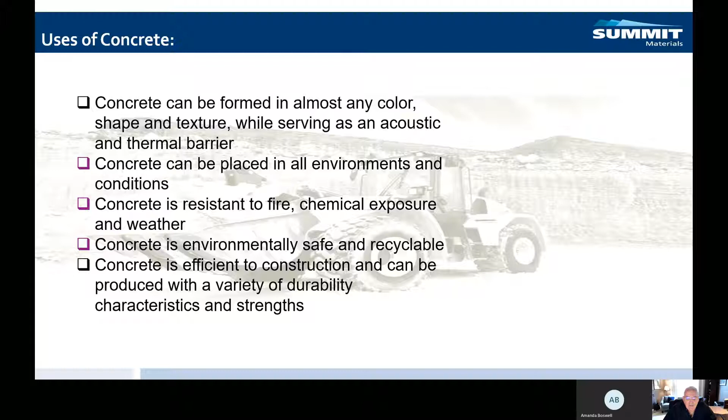All right, so today I'm going to go through the basic process of a ready-mix concrete company. I'm going to talk a little bit about concrete so that you understand it a little bit as a building material and its place in the world. An engineer would describe concrete as a flexible building material. Basically able to be placed in many different environments, resistant to chemical exposure, to weather, environmentally safe and recyclable, which is something people don't often think about with concrete, and an efficient way to build many types of structures.

So you'll see here just a couple of different things that could be built with concrete. It's far and away not limited to these things. And we're going to talk a little bit about the official uses of concrete. But you saw there a bunch of different kinds of structures, things you could see in almost any construction site.

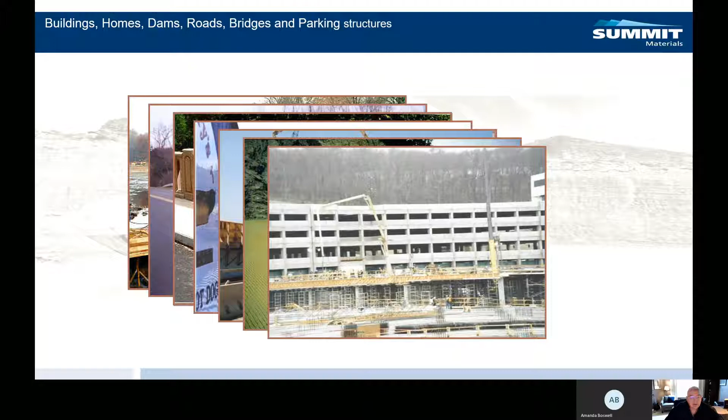A couple of fun facts about concrete. Annual global production of concrete is about 5 billion cubic yards. Twice as much concrete is used in construction around the world compared to any other building material: wood, steel, plastic, aluminum. After around 4 weeks, concrete has reached 90% of its final strength. However, it continues to gain strength for decades afterwards. And due to the conversion of calcium hydroxide into calcium carbonate, it also absorbs carbon dioxide, which is something that I think is also not usually talked about related to concrete.

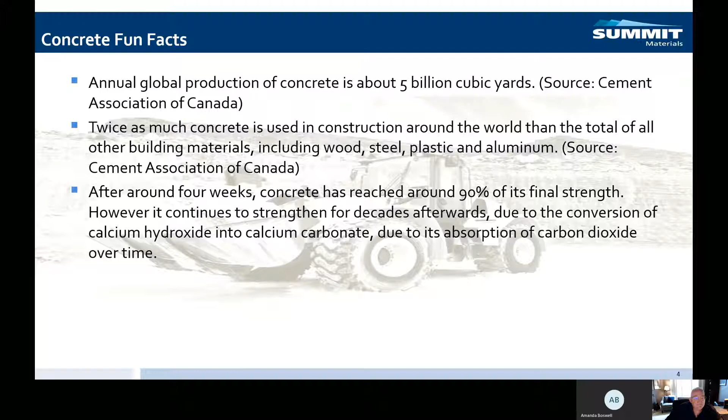So the figures here on the left-hand side show the use of Portland cement. Portland cement is the main ingredient in concrete, and you'll see that about 70% of the Portland cement produced around the world actually goes into ready-mix concrete. And then you'll see a whole bunch of other concrete-related industries off to the left, and those are all much smaller, obviously, but still relevant to our industry because sometimes we work in those groups as well.

On the right-hand side, it shows the breakdown of the kinds of projects, and the biggest pieces there are residential buildings, streets and highways, and then commercial buildings. The rest are small pieces that you would think of in construction. One I'll point out because it's a big cement user is oil well cement, and our business in West Texas actually supports some of the oil well applications. So it's one of the things that you could run into looking at some of our businesses across the country.

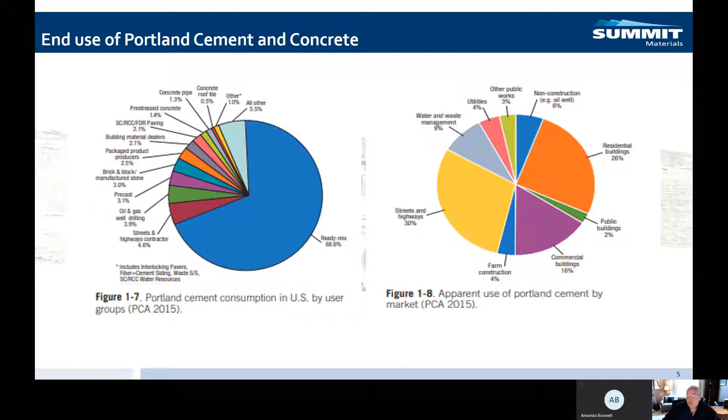So what is concrete? Concrete is 6% air. It's 11% Portland cement. It's 41% gravel and crushed stone and 26% sand, which is the fine aggregate, and then 16% water.

One of the things I think is really important for you to understand about the concrete business in relation to Summit Materials is that the gravel and sand are also products that we make a significant amount of. Our aggregates is by far our largest business. And so we are a large downstream user of a lot of our own products. And it's one of the reasons we're in the concrete business.

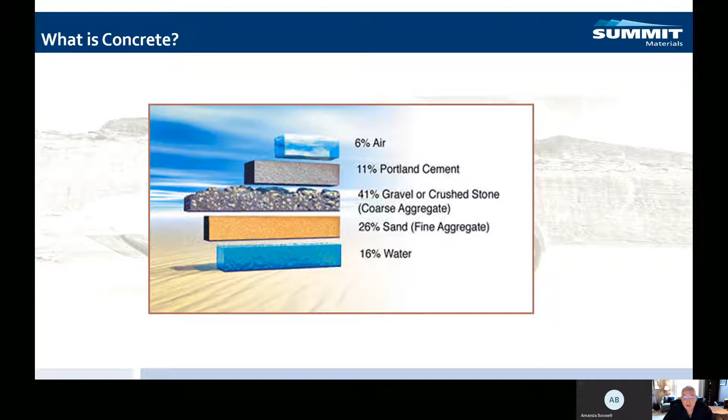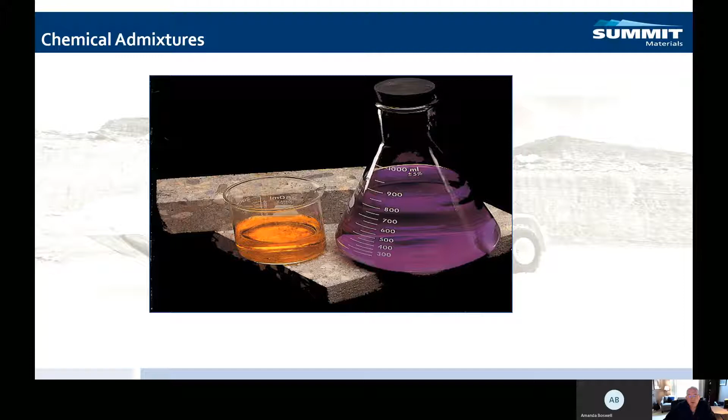Also in those mixtures can be chemical admixtures, and there's things there to reduce the amount of water, to accelerate set or retard set, a lot of different applications that can be further changed through chemistry.

So they are additional products that we use. They're really recycled byproducts. So it's one of the things we do to increase the amount of recycled materials in our mixes.

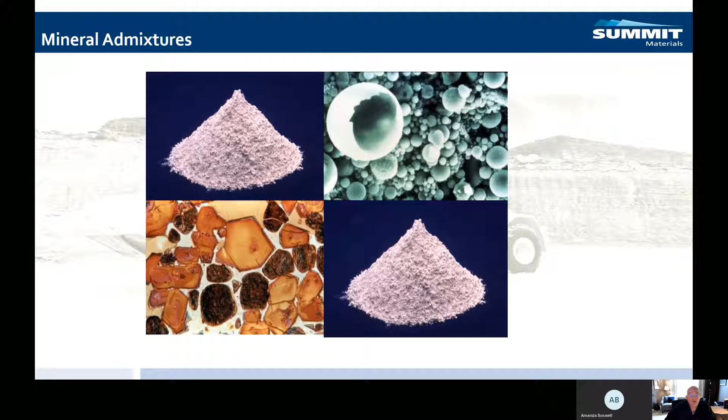Let's talk a little bit about the history of concrete. And this is one of my favorite pieces. Rome was built significantly out of concrete. A lot of the major structures you've seen from Roman architecture, like the Colosseum, were constructed out of a very primitive concrete. It was a cooked limestone and water and aggregate mixture, but clearly it didn't require modern design in order to last for a long time.

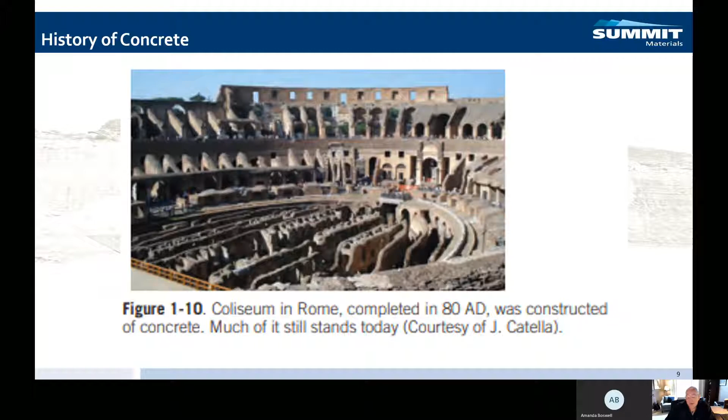The structure is significantly intact and has been there for a very long time. And there's an awful lot of structures throughout the old Roman Empire that are there and still standing.

This is kind of the history of concrete in modern times. I won't read through all these, but one of the things I'll point out is in 1860, Portland cement, which you'll hear a lot when you're at a ready-mix facility. It's basically a design for cement that was named after Portland, England, which is where a particularly good deposit of limestone was first discovered to produce cement. And that has stayed with it for a long time since then.

I think one of the things that is most impressive is the creative ways that people have found to use concrete over history, and the thought of first deciding to build that in a structure I always think is fascinating, because it is a totally different kind of construction than what would have been done over the course of most of history.

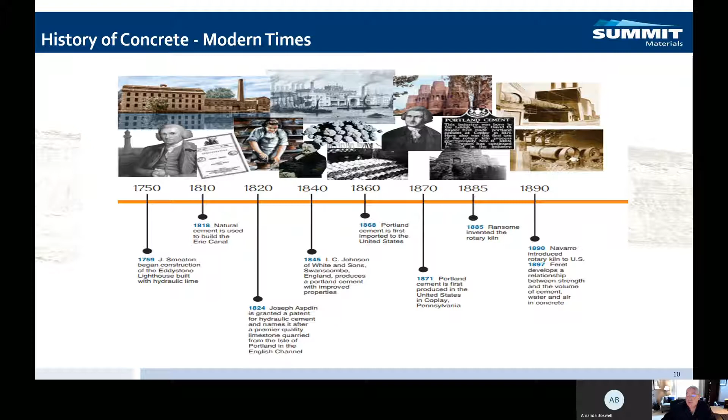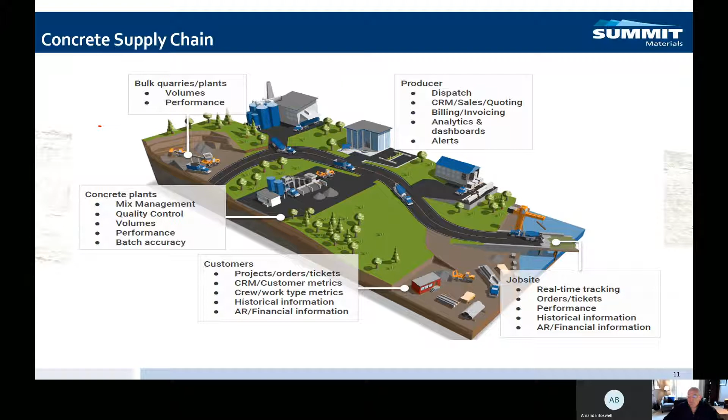So it's just kind of the cycle of where we go from raw materials to delivering to the job site. We're going to talk a little bit more about each one of these, but that is the big picture.

So what I want to show you next, now this is going to be a little bit long, but this is a new NRMCA, and NRMCA stands for National Ready Mix Concrete Association. So it's the major association related to ready mix concrete. And it is produced with the focus on the most important thing that as a new employee, you will do when you go to a ready mix plant, and that's stay safe.

It's a ready mix facility. If you've never been to one before, or you've only spent a little bit of time in one before, they're busy. They're well organized, but they have a tight traffic pattern. There's a lot going on. There's a lot of materials moving. And so they can be dangerous. They're designed not to be dangerous.

And if you follow the rules that you're supposed to, I want to say that you'll be as safe there as you are anywhere. But the first thing, and we'll talk a little bit after the video is over, the first thing I want you to see is what National Ready Mix says you do to be safe at a concrete facility.

Welcome to a lesson in the National Ready Mix Concrete Association's online safety series, Ready Mixed Concrete Plant Safety. The plant safety video lesson was generously funded by the RMC Research and Education Foundation.

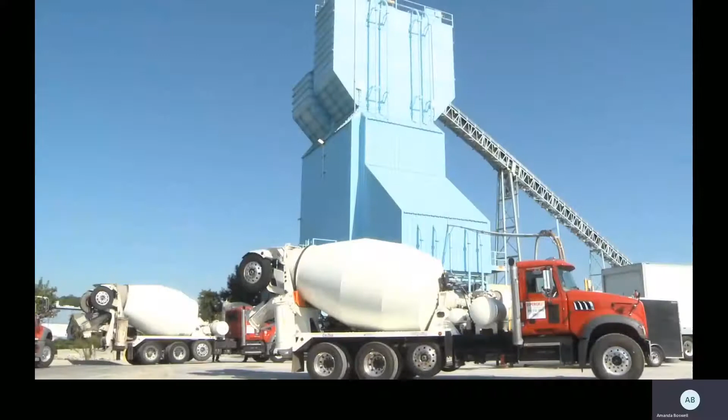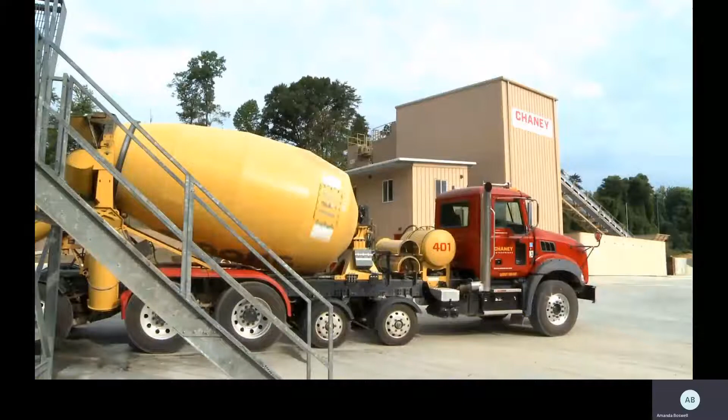There is a lot of activity at a ready-mix concrete plant. Aggregates and cement are transported by various methods to scales and batchers. They are mixed, and then they're put into mixer trucks. Ready-mix concrete trucks are rinsed, the concrete slump is checked, and the trucks are ready for the road. Dump trucks bring raw materials to the plant, and tankers deliver cement to silos. Front-end loaders move materials around the plant. And in short, a ready-mix concrete plant is like a small city.

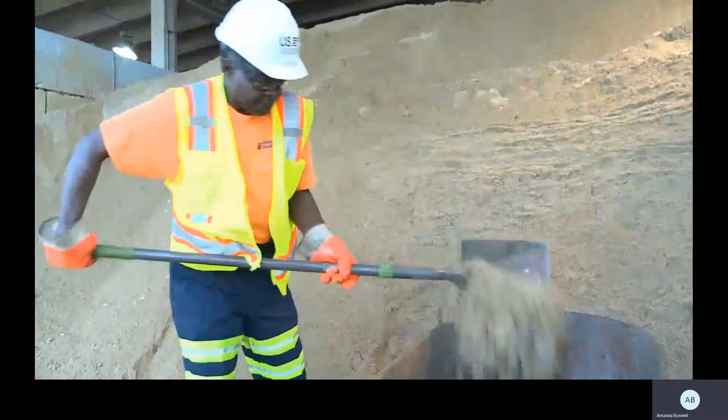Whether you're a plant operator, yard man, mechanic, concrete delivery professional, or you're just a visitor, you have to pay attention to what you are doing and follow basic safety procedures at all times. In this video, we will cover plant-specific safety, including plant vehicle traffic, wearing the proper personal protective equipment, general plant safety signage, prevention of slips, trips, and falls, general plant safety inspections, lockout and tag out of power sources, and plant housekeeping, and much, much more.

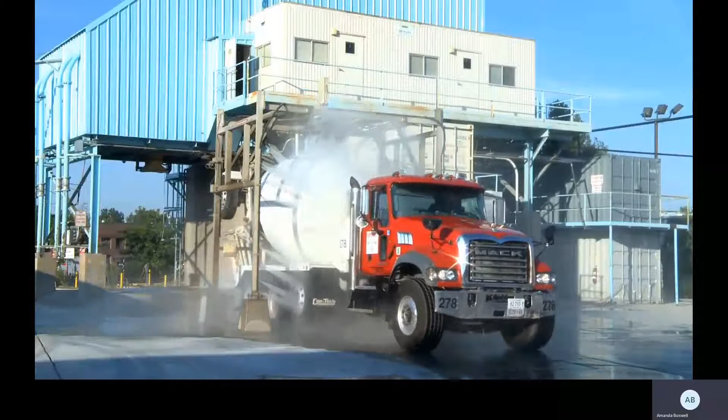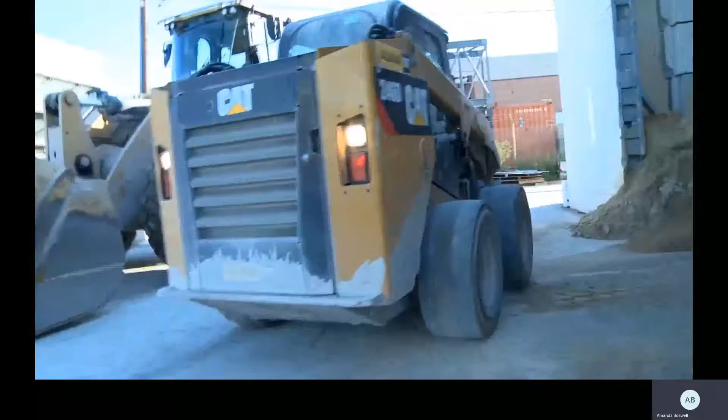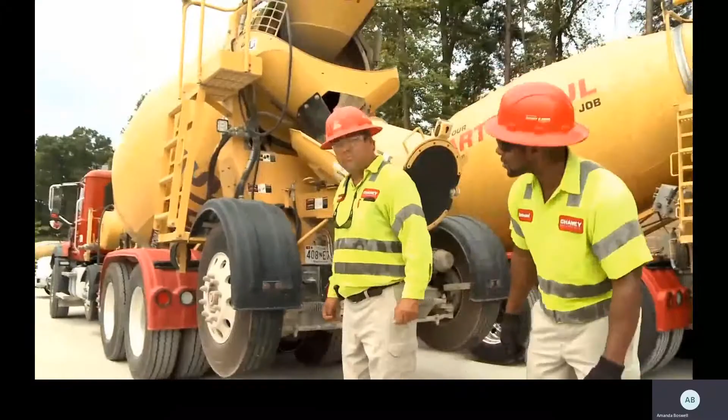As mentioned earlier, concrete plants are busy environments. Specifically, the number of vehicles operating at a concrete plant are numerous and continuous. Throughout a typical workday, there are any number of vehicles moving about, including concrete mixer trucks, cement tankers, aggregate haulers, company and personal vehicles, forklifts, front-end loaders, and other industrial vehicles. All personnel at a concrete plant should constantly have their eye out for moving vehicles, whether entering the concrete plant property, exiting a structure at the plant, or simply working in the plant's yard.

Also, personnel should be aware of the special dangers of trucks that are backing. As well, look out for and obey any and all signage for designated walkways inside and outside of the plant. And finally, remember, make sure you give all vehicles the right of way.

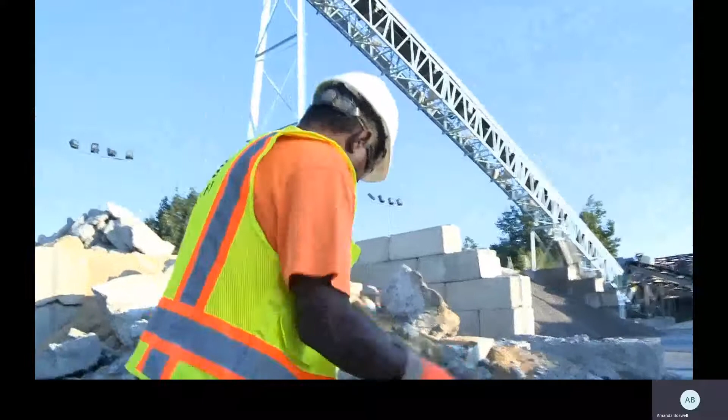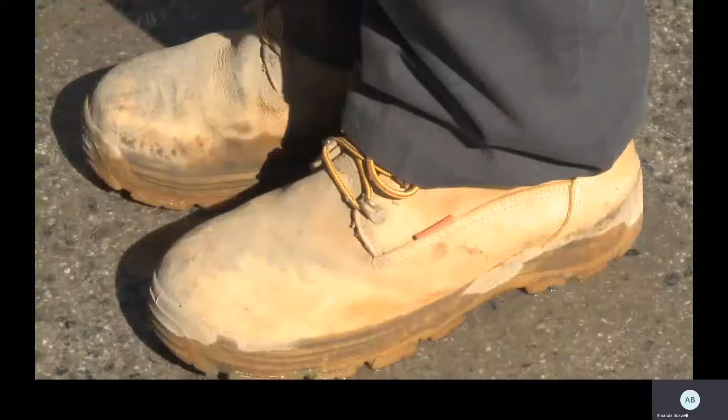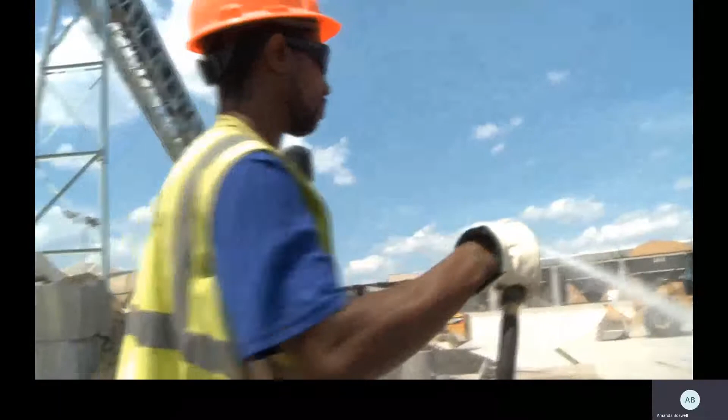Depending on your job and work assignment at a concrete plant, the PPE that you should wear will vary. As a certified delivery professional, a hard hat, safety vests, safety glasses, chemical-resistant gloves, and the appropriate safety shoes need to be worn. While performing the duties of a yardman or laborer, a hard hat, safety vest, safety glasses, and appropriate safety shoes will be required. Additionally, you may need hearing protection, a respirator, and work gloves.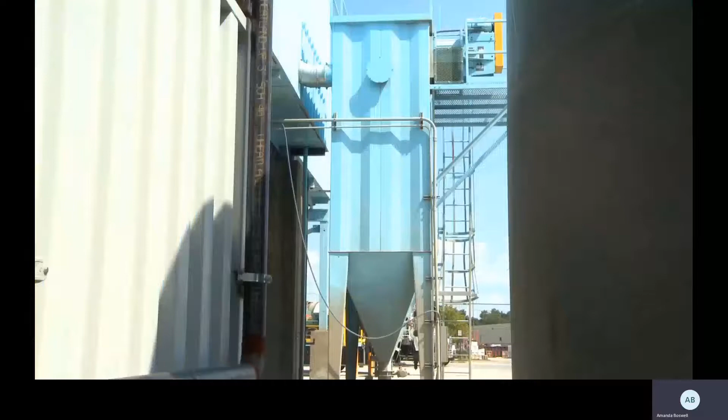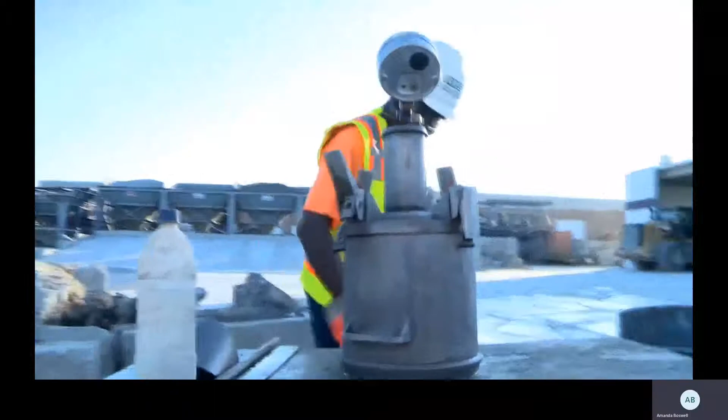If your job requires you to enter a bin or a silo, dust collector, central mixer, or any confined space, then you also may have to wear a full body harness and may be accompanied by a supervisor and/or an attendant. No matter what your job is and the task at hand, you'll need the proper PPE. If you have any questions about what personal protective equipment to wear, ask your supervisor or the plant manager for guidance before performing the work task.

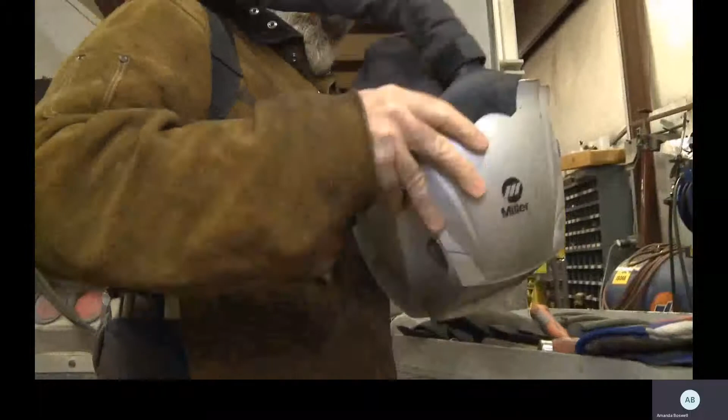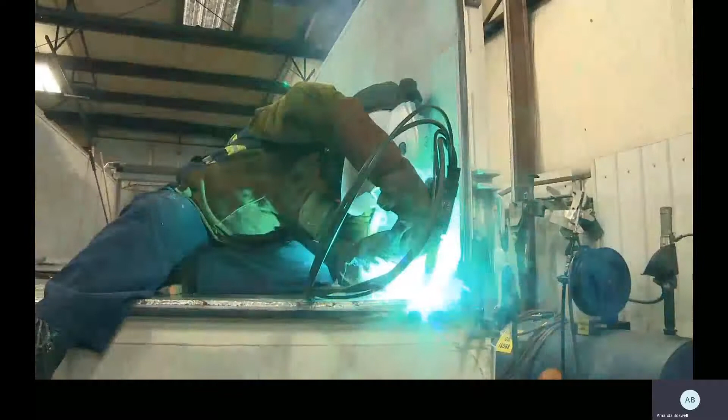Finally, when around welding activities, these tasks should be only performed by authorized personnel using the proper PPE. As well, any other personnel in the vicinity of welding activities should never look directly at the welding process without proper eye protection.

For a plant manager or a plant operator, signage is one of the first items for review. Are there posted traffic control signs in and out of the plant? At fuel stations, there should be no smoking and flammable liquid signs. Any hazardous material needs to have proper labels and to be stored only in designated areas. Or PPE signs in the proper areas where required PPE is to be worn.

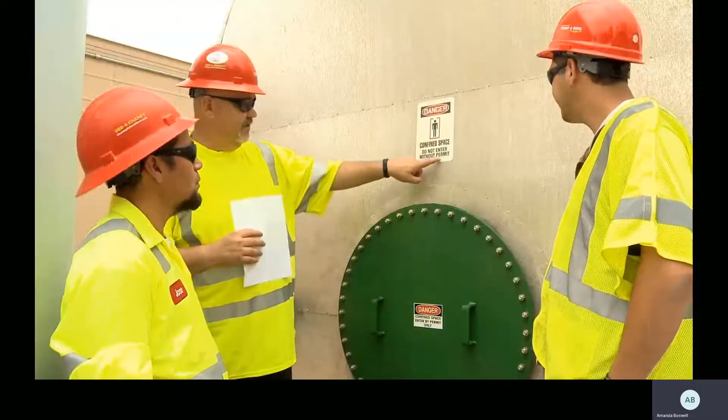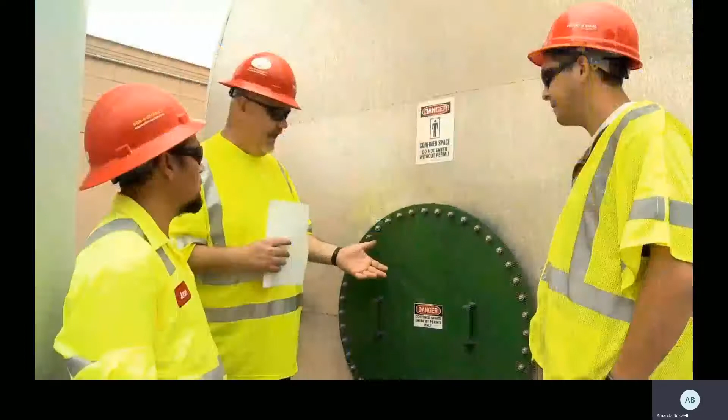Confined space entry signs need to be posted and visible to all employees in areas that are considered confined spaces. These may include central mixers, hoppers, bins, dust collectors, material storage areas such as silos, and even where some conveyors operate. These areas may only be entered after a supervisor has trained employees on the confined space entry procedures, a permit is signed by workers and supervisors, atmospheric conditions are tested, and the proper PPE is worn.

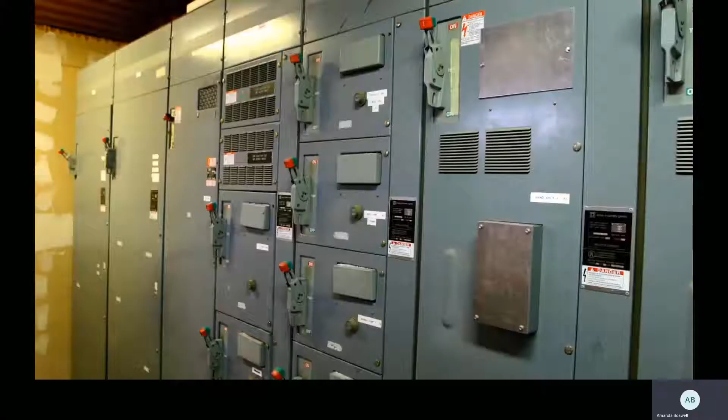Signs must be posted identifying areas that require lockout and tagout procedures before workers perform inspections, maintenance, or repair. Primary and secondary power source terminals and switches need to be completely labeled to all equipment. All breaker panels need to have individual switches labeled to identify equipment energized by these switches. There should be no gaps or missing switches.

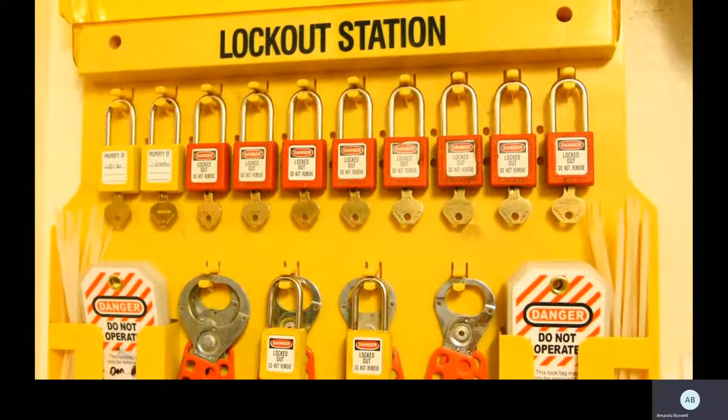Lockout boards and signs may be posted at the plant. They should have multiple lockout devices and individual locks and keys on them, and be placed in a central location accessible to authorized employees during their work shift. If there are regulated areas at the plant, signs for those areas must be adhered to.

As well, fire extinguishers should have individual signs displaying the location of each fire extinguisher. Never allow clutter or obstructions to block the pathway to the signage or the fire extinguisher at any time. All exits must be clearly marked with lighted signs.

Historically, slips, trips, and falls are the leading cause of injuries at concrete plants. Always walk at the plant. Don't run. Workers and visitors should always wear the proper work shoes at all times. A good sturdy pair of lace-up boots, approved by your company, is a good place to start. The moment you arrive for work, make sure that those shoelaces are tied. By the way, those soles need to have a good tread on them for good traction.

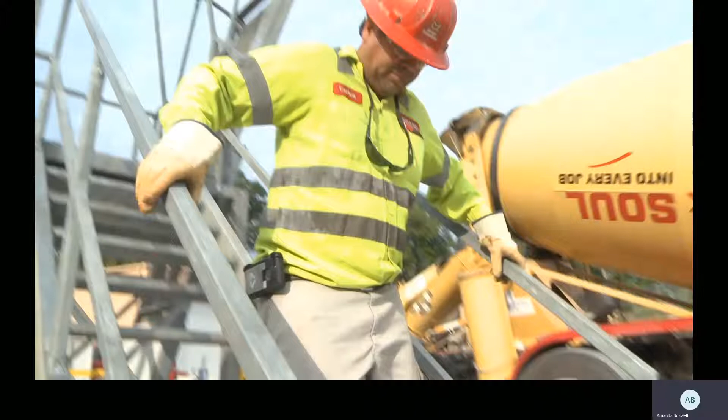Use handrails going up and down stairs. Don't carry tools in both hands, preventing you from using the handrails. Don't put both hands in your pockets when walking on stairs. Don't carry an object tying up your hands and blocking your view. Leave a hand free for the handrail and watch where your feet are going. Avoid things like stepping on tools. Avoid a collision at a blind corner.

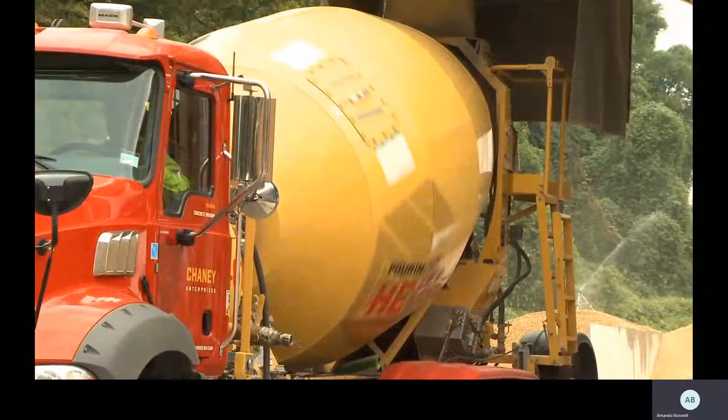Step carefully in wet areas. Often in the load lane or rinsing and slump rack areas, the surface may be wet, which can be slippery. Concentrate on every step and walk carefully when in these places. When working around the discharge points of the plant, use caution not to walk directly under the discharge area. Materials may become dislodged and fall on you, even if the equipment is not currently in the discharge mode.

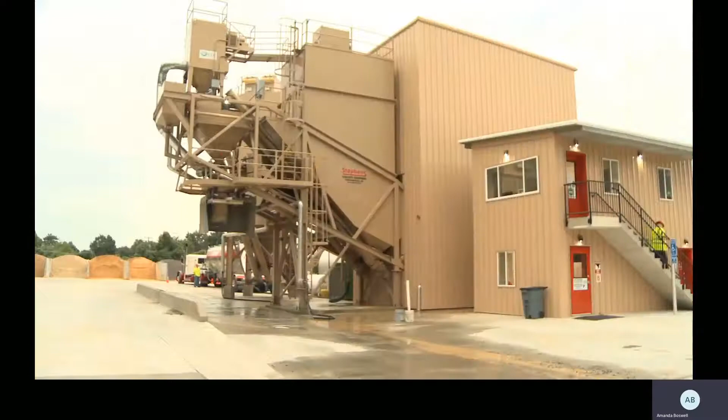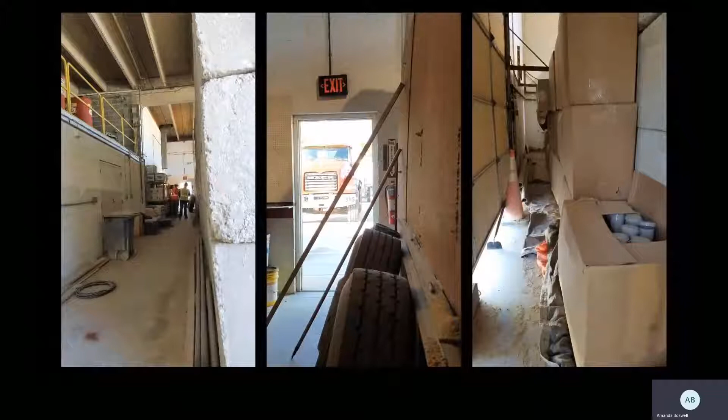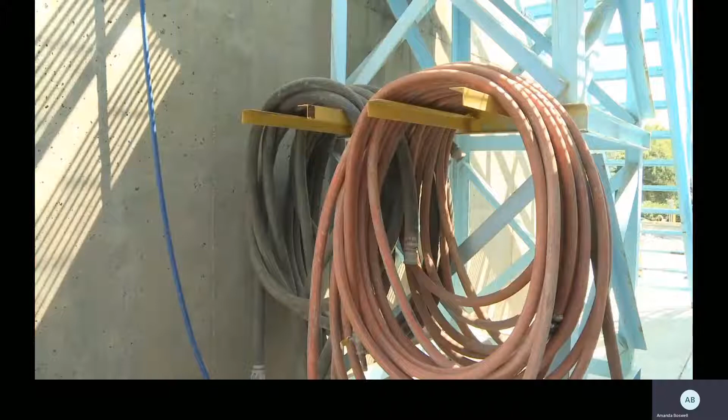Regularly scheduled plant safety inspections will be conducted. During a walking visual inspection around the plant, are steps in a proper state of repair? Are all handrails in place and usable up and down stairways? Are there bags, boxes, or items cluttering walkways, or are they stored neatly? Are there places for washdown hoses to be coiled and hung so that employees may walk through those areas without tripping? Plant walkway inspections for cleanliness need to be performed.

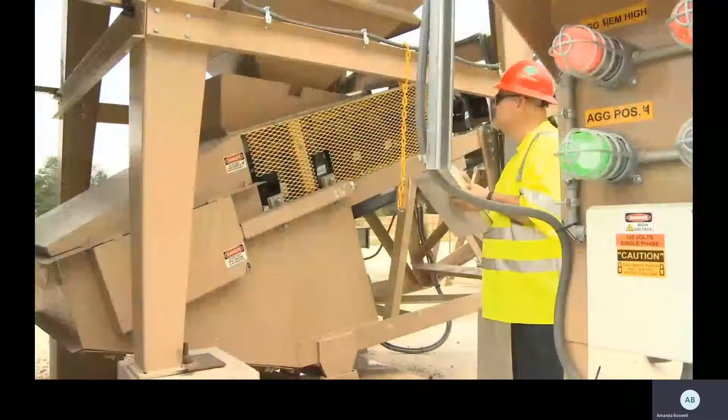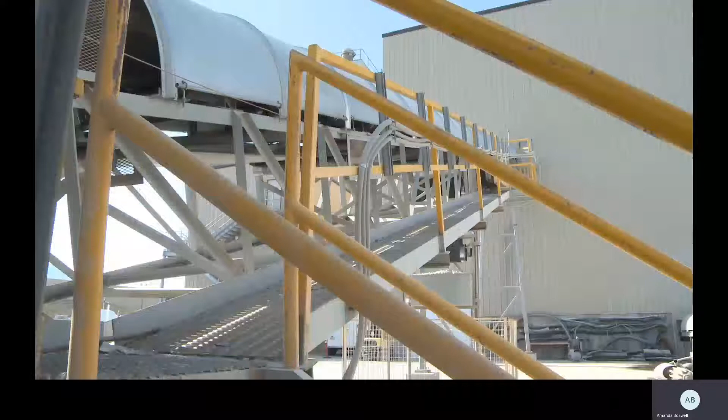And is there excess buildup on the walkways? Does buildup come into contact with water, forming slippery conditions? If so, have the areas cleaned so that slips and trips don't occur. On conveyor belt systems, are all head and tail pulley guards in place? Are all handrails in a good state of repair and available for use? Do emergency stop cords work correctly when pulled? Are the conveyor walkways free of excess material buildup?

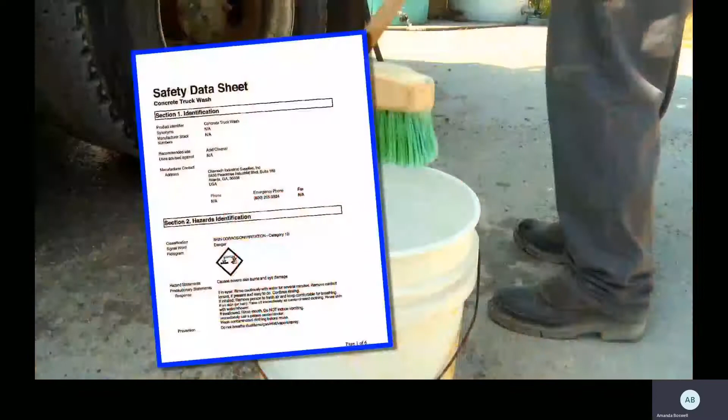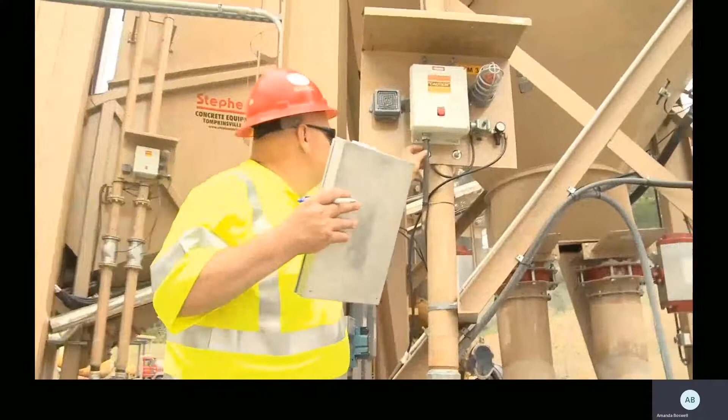Safety data sheets need to be kept and accessible to all employees. These product information and first aid remedy sheets will have specific information for various hazardous materials and products found at the plant. When making plant inspections, be observant, be thorough, and if there is a safety hazard or defect you've identified, have it corrected at once.

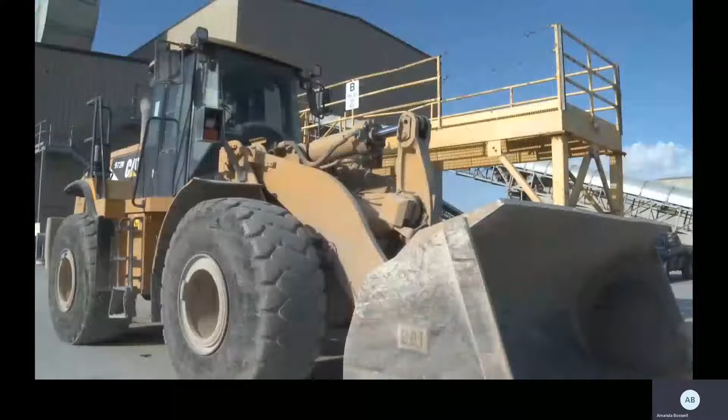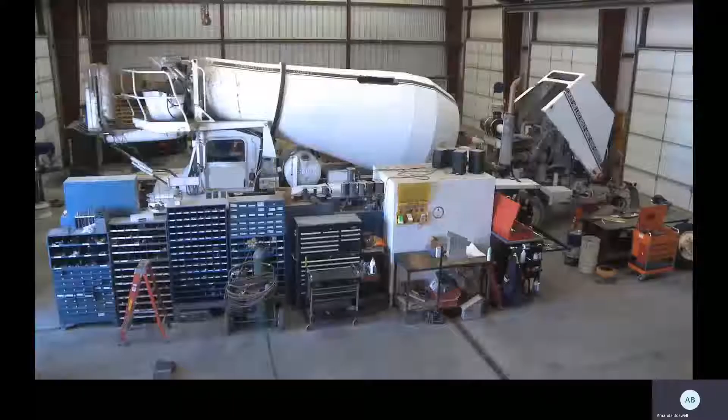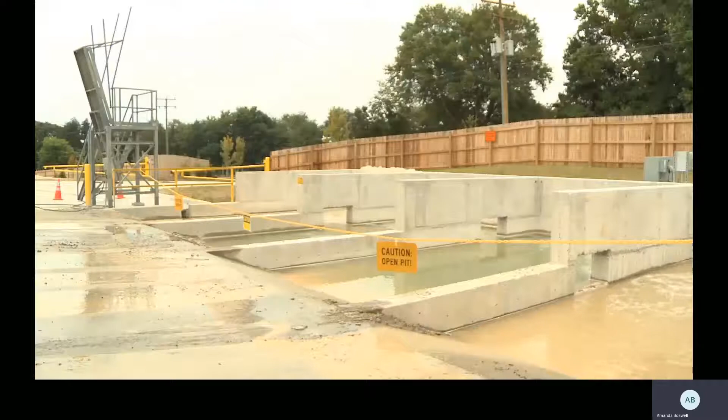Other areas of particular concern for regular inspections include, but they aren't limited to, aggregate storage areas, confined spaces, dust collection systems, compressed air systems, maintenance shops, warehouses, admixture and color storage areas, cement and fly ash filling areas, truck washout areas, and outside lighting.

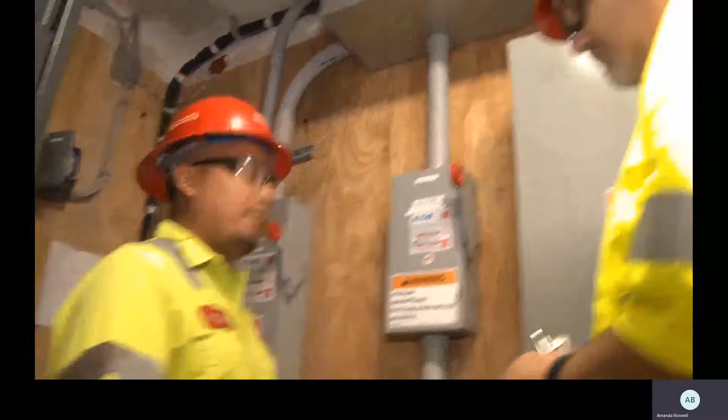Whether you're working on a conveyor, a central mix drum, a scale gate, or checking rubber boots, when you inspect or repair a piece of energized equipment at the plant, you first need to lock out and tag out the power sources to the equipment and test it before inspection or repair.

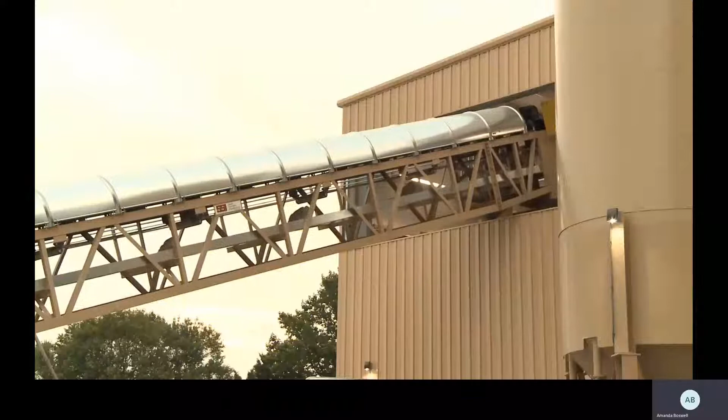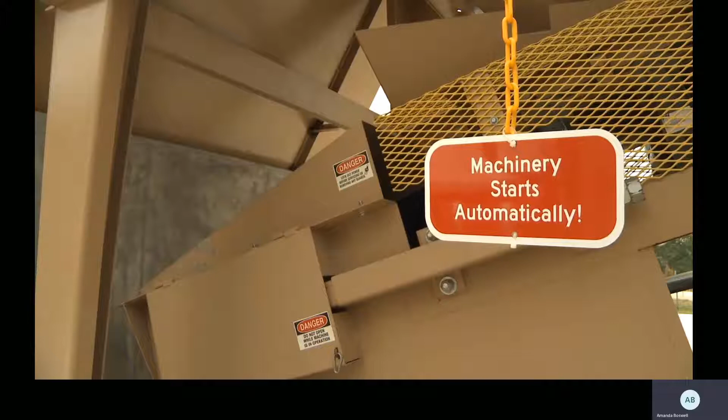Never attempt to clean, oil, adjust, or repair any machine while it's in motion. It doesn't matter that you'll only be in that area for only a few seconds or minutes. That is all it takes for equipment to start without warning and to seriously injure or kill you or another worker in the absence of observing lockout tagout procedures.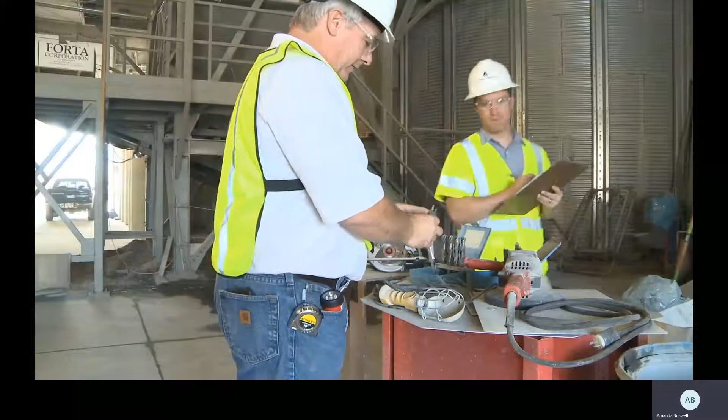For more detailed information on lockout tagout, please refer to NRMCA's online safety series, Lockout, Tagout, Tryout in the Ready-Mix Concrete Industry. Always remember, operations of electric-powered equipment can be as safe or as hazardous as you make it. Proper inspection, maintenance, and repairs will keep all personnel safe.

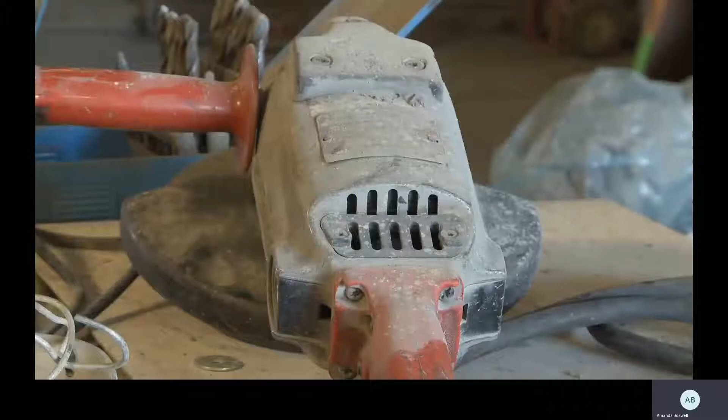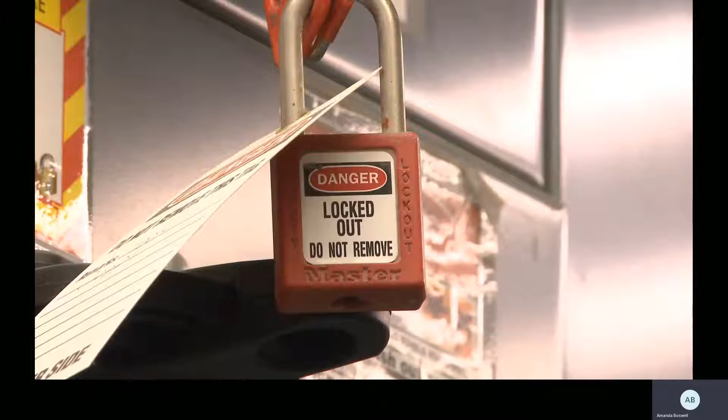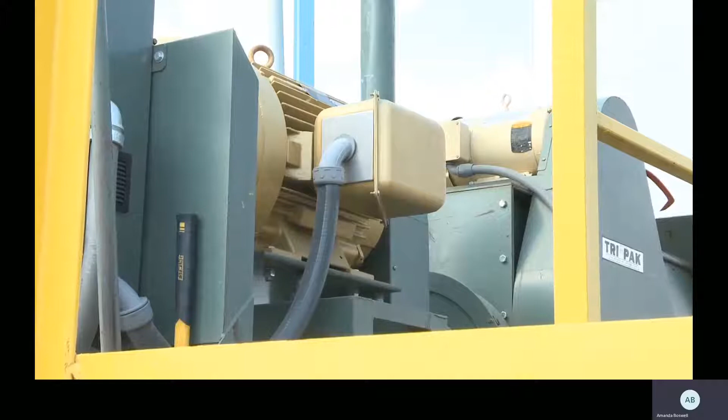First and foremost, a qualified electrician should perform all repairs to any electrical systems. Any electrical repair should be accomplished in strict accordance with lockout and tagout procedures. Make sure that all electrical equipment is properly grounded. During routine plant inspections, make sure that all electrical cables and electrical enclosures are in good condition and kept out of any water.

As you can see, there are many people and lots of activity underway at a ready-mix concrete plant. Use safe work practices in every task that you perform at the plant. If you have any questions about safety procedures or tasks, ask your supervisor or the plant manager for instructions before performing these tasks. What we want to leave you with is this, that safety in the workplace is about making sure that each and every worker gets home at the end of the day the same way that they started, healthy and alive. Adhering to sound plant safety practices is just one more way to ensure this happens.

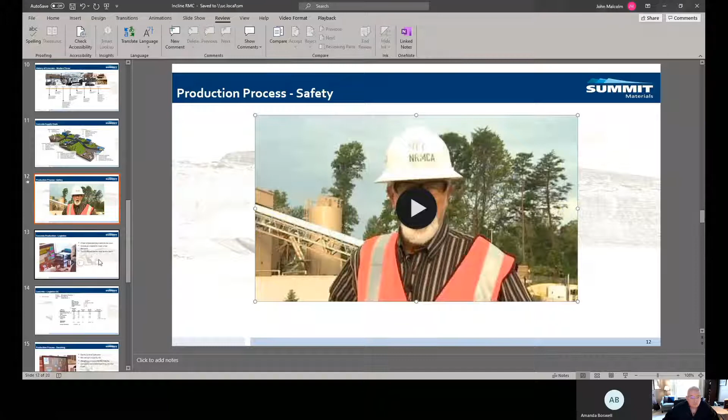Amanda, you good? Yes, you can go ahead.

Okay. So the only thing I'll add to that is just remember, anytime you go into a new facility, it's important for you to ask the folks that work there, tell me about the particular safety procedures at this plant. Is there anything that I should know? It's the most important thing you're going to do, especially early on, is keep yourself safe, keep yourself out of harm's way.

So moving on to the concrete production process, we're going to talk a little bit about how concrete becomes concrete. We'll talk a little bit about dispatch, logistics and production. An order comes in from our customer, hopefully days before the pour is actually required. It gets put into this computer system, which we have at every concrete location. They work a little different depending on which operating company you're at, and then a schedule is created to meet the demand for those customers. So every day we'll create a schedule for tomorrow that will have every single load that we're expecting to make the following day. And then the trucks are dispatched from that to load at the plant.

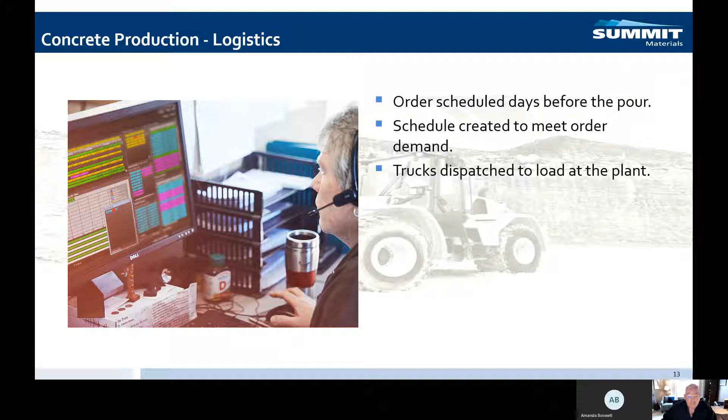One of the things that they'll put into that system is a concrete mix design. Projects are set up and they have specific mix designs that have been agreed with the specifier and the customer to meet the design requirements for the project. What comes out of our system, and it comes from our QC system into the system you saw there for dispatch, basically shows the design weights that will be weighed up by a computerized batching system. These are calculated off the specific gravities and absolute volumes of the individual constituents. And they're working to get to a cubic yard, which is right here, 27 cubic feet, and right around 145 pounds per cubic foot.

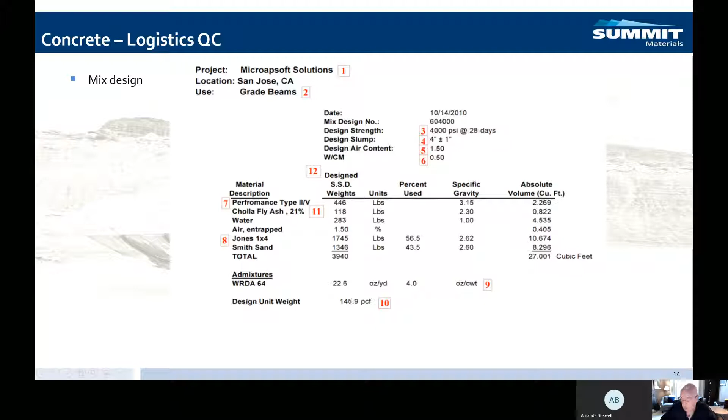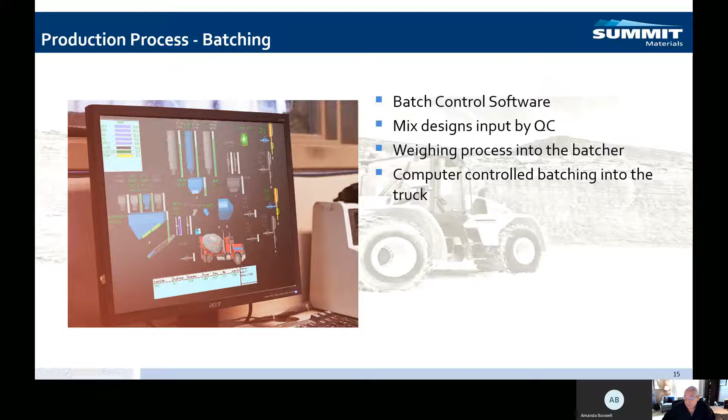And all of these here represent the vessels for holding raw materials. It's computer controlled batching, done to a very tight tolerance in order to make sure that the performance of the concrete is as consistent as possible.

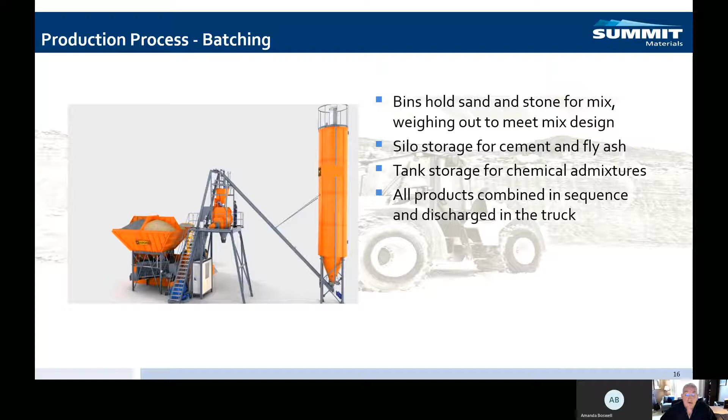These silos over here hold cement and fly ash or blast furnace slag, and they all get weighed by the computer into this weigh hopper right here, and the truck will be under here and will load through this spout right there. So it's relatively simple. It takes between 3 and 5 minutes, but the weighing is focused on accuracy, so that it will perform at a very high level.

This is a concrete delivery vehicle. They come in a couple of different shapes and sizes, but this is a specific one out of our group in Houston. The concrete rides in this barrel right here and will spin most of the time that the concrete is in the truck.

Once batched, there's a mandatory mixing requirement. So there's a certain amount of turns on that drum that have to happen in order for that concrete to be ready to ship. After that, the truck leaves the plant to deliver to a specific job site, and on site, the driver is adjusting mix water to make sure that the mix stays within the requested tolerances that are required by the job.

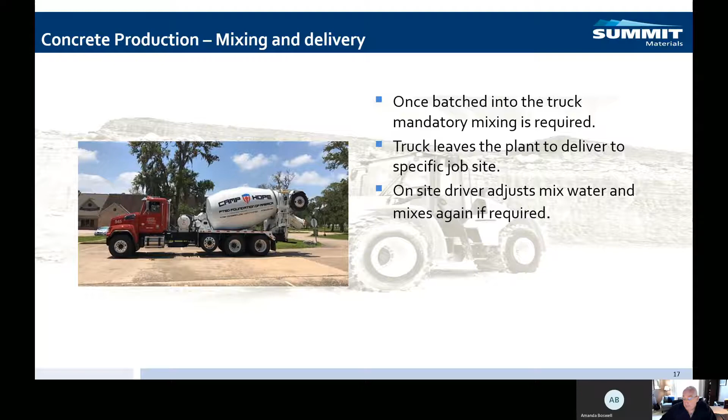Once we've delivered the concrete, the rest of the work is going to be performed by the customer's finishing crew. And at that stage, concrete is also often tested to make sure that it's met the specification that's been designed. That testing will take place in two different ways. One is the plastic testing, related to wet concrete, and then they'll make specimens so that they can test what the hardened characteristics will be after the concrete is set up.

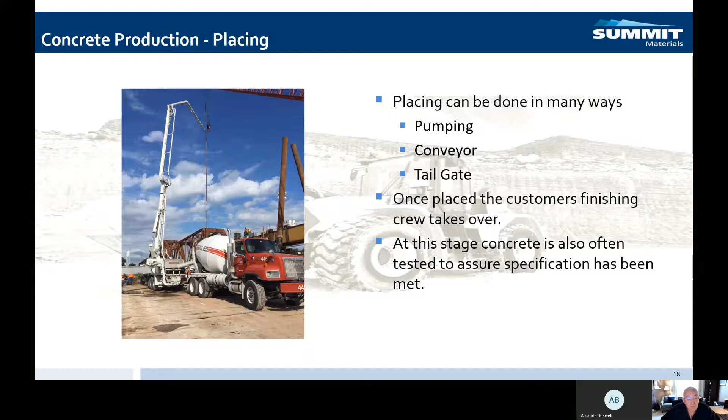Things like cycle time; cubic yards per driver hour, which is an efficiency measure; batching accuracy, which basically lets you know how close to the mix design recipe you batched into each individual load and over the course of time. Order performance, so how well does a customer do as far as meeting what he ordered? Did he go way over or way under? That has a lot to do with the efficiency you have as a group.

And then of course margin, which is the one that gets talked about in a lot of different ways. But that's essentially what pays for us to do what we're doing, and so it's very important.